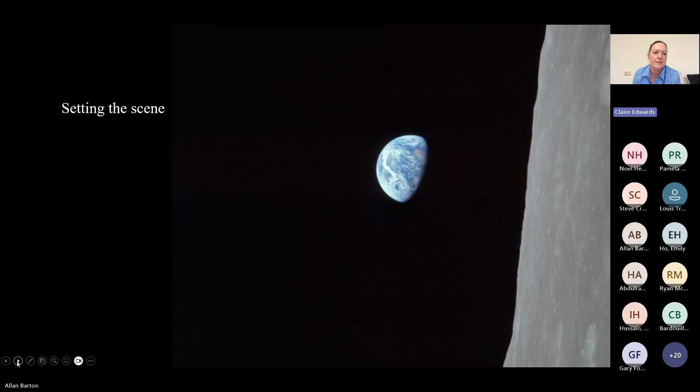So here we are for our talk today. Now, I think, Alan, it's really important to ground us in this topic of the circular economy as we start, so could you please set the scene? Okay, well I'll set the scene and explain why we need a circular economy. But first I'm going to talk about how we got to today. There were three major events that occurred between those dates.

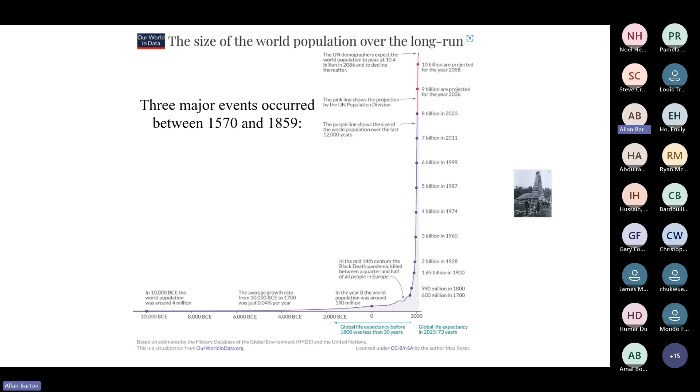We discovered affordable sources of energy, we had an industrial revolution, and our population started to increase significantly. In fact, it went off like a rocket, as has our ingenuity, our GDP, our ability to produce power, and our use of the planet's resources.

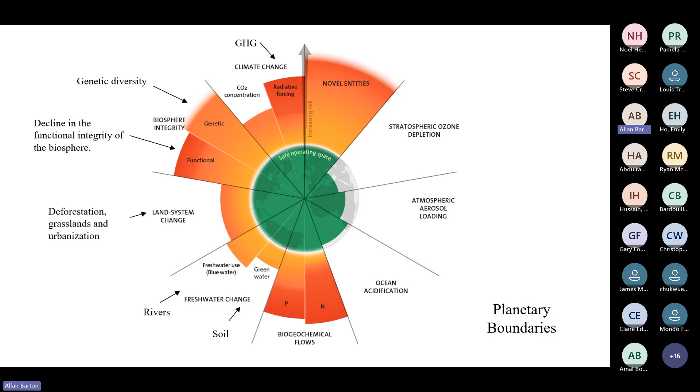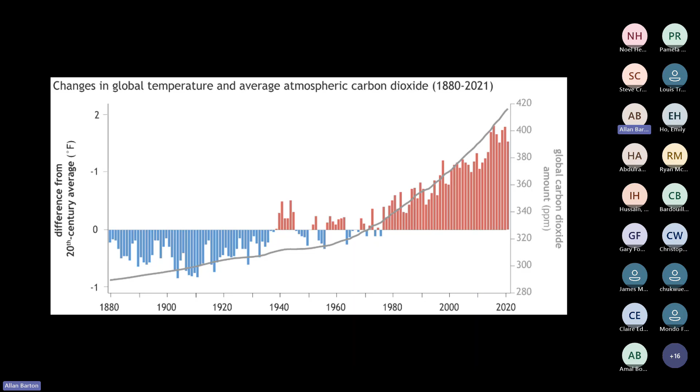And more importantly, our use of green water - green water is the water that grows our crops. We use far too much fertilizer, and we've produced an enormous amount of toxic materials. Our carbon dioxide in the atmosphere has increased, and that's caused our temperature to rise. And now roughly 50% of our planet is there to feed us.

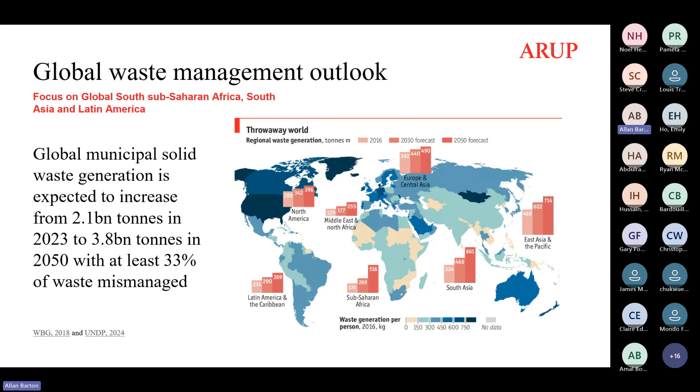In the past 6 years, we've used over 500 billion tonnes of materials, nearly as much as the entirety of the 20th century. And in 2023, we produced 2.1 billion tonnes of municipal waste.

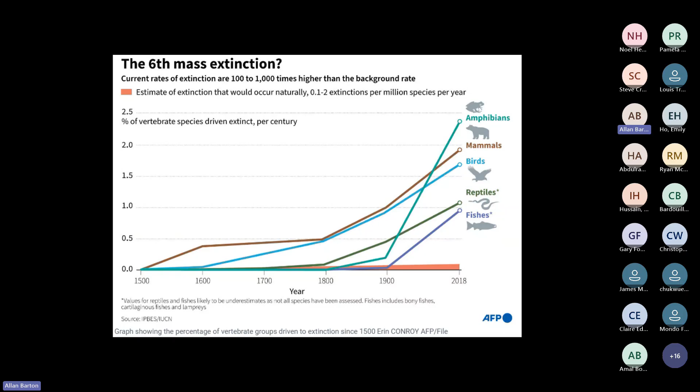There is a view we are at the start of the 6th mass extinction event on this planet, caused by us. Most of the time, we've lived in a linear world where we take materials, make them into something, and then simply dispose of them.

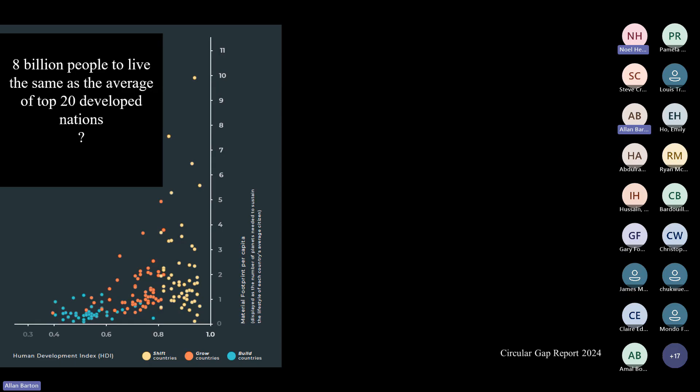My question is, for 8 billion people to live the same as the average of the top 20 developed nations, how many planets do we need? Well, the answer is 3.6. Guess what? We've only got one.

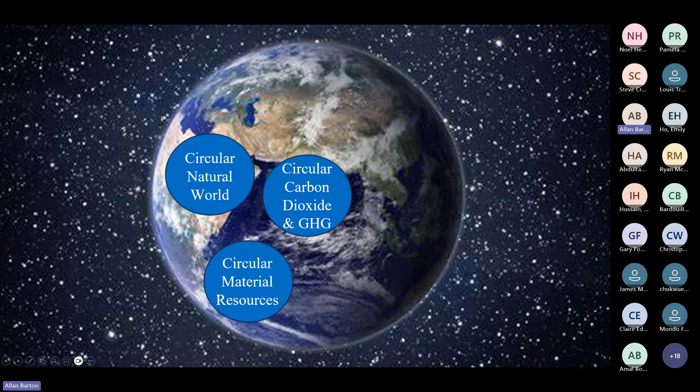So what must we do? Well, we must deliver on the UN sustainability goals, and we must start treasuring our planet and have circular ecologies and a way of managing our home in a circular way, a circular economy, particularly with regard to greenhouse gases, the natural world, material resources, water, atmosphere, and population growth.

On greenhouse gases, we must get our carbon back in balance again and deliver on our COP promises, focusing on all greenhouse gases and all sectors that produce them. We really need to develop a joined-up plan to get us to the point we wish to be. And if we can get back to pre-industrial levels, that would be great.

The natural world, well, we've got to stop reducing it and re-establish the natural world, delivering on our COP promises. Material resources, we must treasure them. We've got to realise that the planet's inorganic resources are finite and never disperse them beyond the reach of future generations. We've got to reduce consumption, consider whole system thinking when we design things, and produce no waste.

As far as water goes, we must treasure and manage our water, and we can use nature to help solve some of our problems. But we've got to stop polluting our rivers and oceans, and if we can get the global ocean temperature to decrease, that would be brilliant.

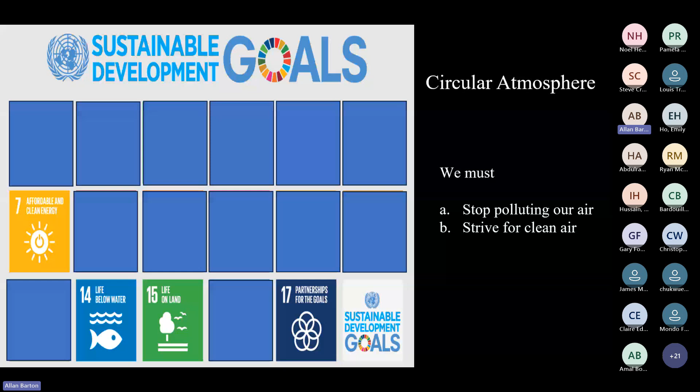Atmosphere, we've got to stop polluting our air and strive for clean air, including clean technologies for transport. Population, well, hopefully if we provide a reasonable lifestyle for all and better education globally, our birth rate will equal approximately our death rate.

So we need circular ecologies and a circular economy.

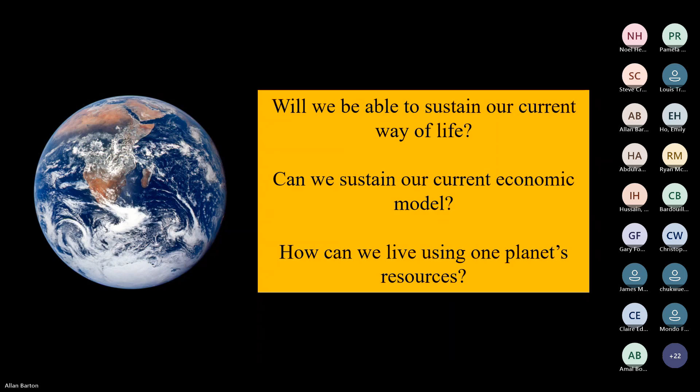Now I've got some difficult questions for you. Will we be able to sustain our current way of life? Can we sustain our current economic model? How can we live using one planet's resources? Is humankind doomed? Yes, things aren't too bad, but they're getting worse, and we potentially have some tidal waves coming at us. So we need to start acting seriously now.

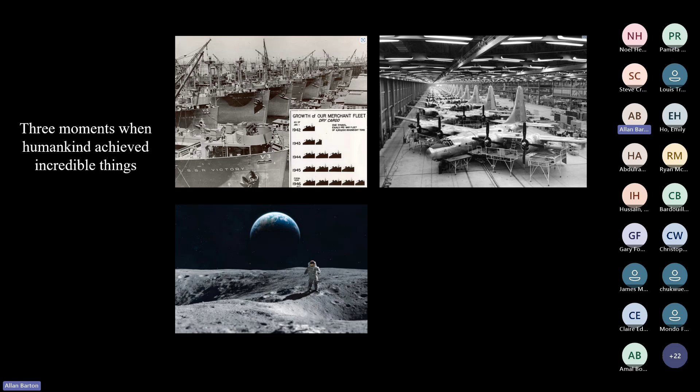Is it inevitable? Is there hope? There were 3 moments when humankind achieved incredible things. In the Second World War, the United States significantly increased its production of ships and planes, and we won a war. We put a man on the moon, and we produced a vaccine very quickly. We need that mindset applied to living in harmony with our planet, because provided we do, and get on with it now, I think there is hope.

And then if we all play our part, hopefully we can make our planet smile. Thank you.

Thank you, Allan. You've really done a great job there of positioning our circular economy, definitely treasuring our material resources, stopping polluting our water and our air, and making sure we have that joined up plan. So maybe moving now on to Steve, because based on some of the things Allan was presenting as ideas, what would you like to share with us about upstream oil and gas?

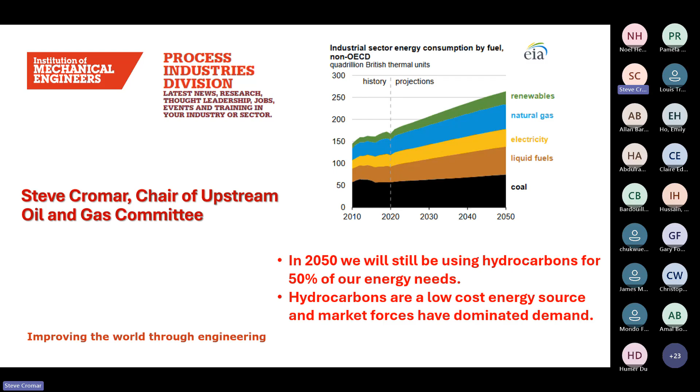So I thought I'd start with something non-controversial: drill, baby, drill, the oil industry.

Since Mr. Trump told us we should drill, baby, drill, we looked at that. If the oil industry starts producing more oil, it's a global market, so the price drops. If the price drops, drilling slows down, people are laid off, and the oil price drops again. So we end up with an oil price set globally, not just by one politician. And it's interesting that since making the statement, the oil price and drilling have barely changed.

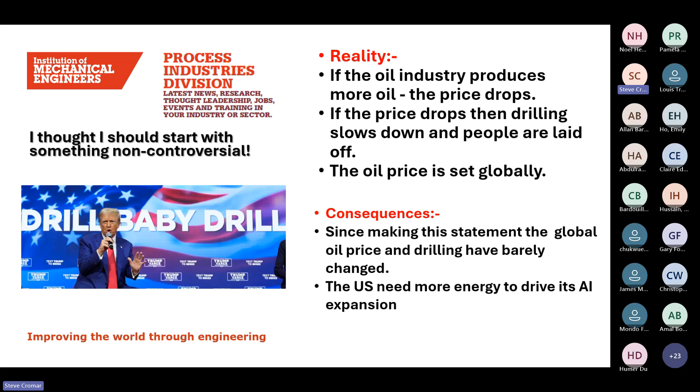But the US needs more energy, and it's mostly for AI expansion. AI and Bitcoin are using more and more energy. People can ask, is that helping the planet a lot, or is it just helping some rich people? The amount of energy used in Bitcoin and AI is unbelievable.

But one of the other things that was hidden was that in addition to drill, baby, drill, Doug Burgum also said mine, baby, mine. The US administration have put an enormous amount of taxpayers' money into the coal industry, opening federal lands, slashing royalties, and extracting more coal. The reason is that the US has large coal resources.

But it's impossible for coal to do that because it's not a reliable power grid. The peak demand required is absolutely enormous, and coal's simply not going to do it.

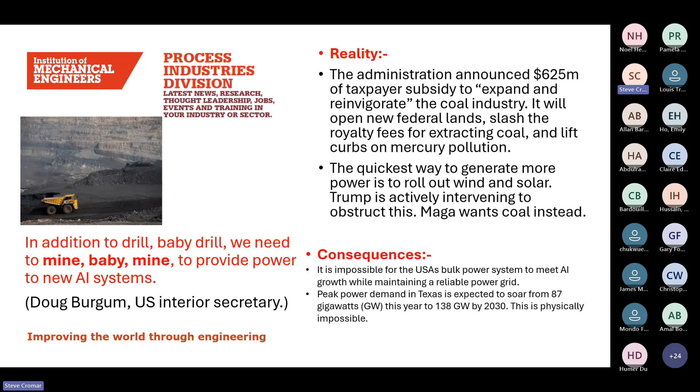Now, this is one of the main reasons: if you look at oil and gas, large construction projects, whether you drill, baby, drill, it's going to take 5 to 7 years to get that major construction project out there. On the other hand, look at offshore wind, onshore wind and solar, 1 to 2 years - a much faster turnaround time to get your energy onto your system.

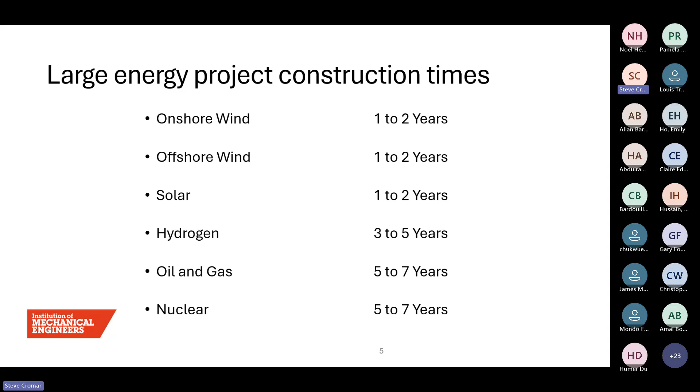China wants to expand its AI production, that's why. They also want to get away from high-cost hydrocarbon imports, and they're allowing market forces to determine electricity generation sources.

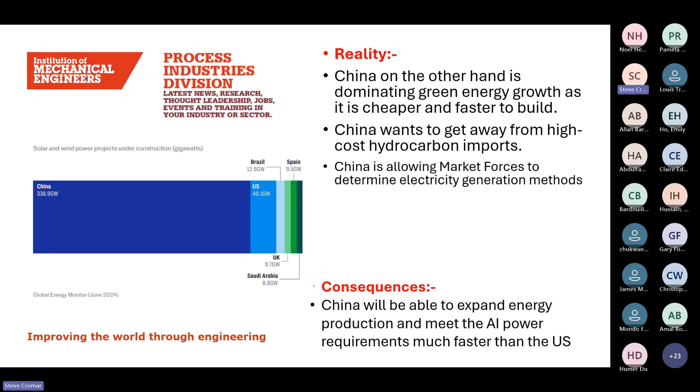So what have we learned? Expansion of the future market is dominated by AI power requirements and air conditioning, keeping those units cool. Renewables are a much faster way to increase energy production, and that's a much better way for the planet as well. Electricity from oil, gas, coal and nuclear are high cost to build and always deliver late and leave legacy issues.

So the message here is that political interference is a major blocker to energy efficiency. I'm talking about energy efficiency - I'll be using those two words all the way through here.

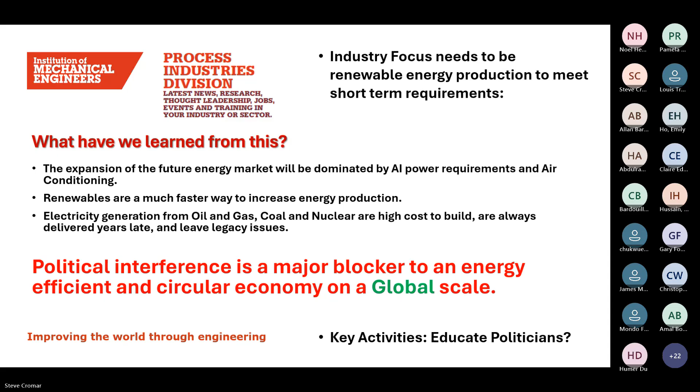So let's look at it in the UK market. The price of electricity in the UK is set every half hour by the marginal cost of the last generating unit to be turned off to meet demand. You need to try to understand this.

The government had considered a zonal pricing system - basically you'd have lots of electricity in one particular area, so the price would go down using market forces, energy efficiency. Under the scheme, power costs would match local supply and demand. It would lead to lower energy costs, and areas with abundant supply could possibly get AI farms to go up there and build where electricity is cheap. That's used in Australia, Italy, Sweden, and many other countries.

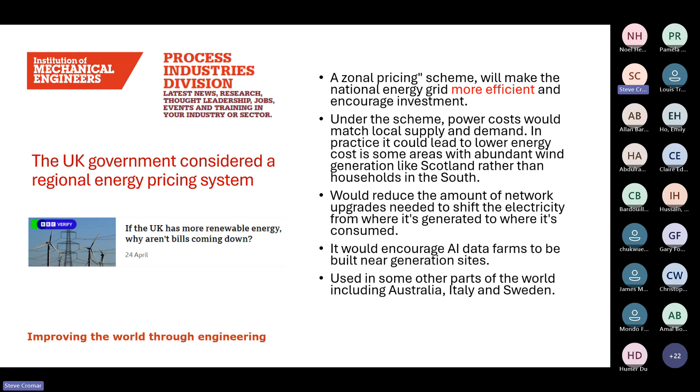You can see at the moment the map shows the location of UK data centres, and they're all located down towards the south. But all the cheap electricity is being produced up in the north, and we're having to build massive pylons - highly inefficient, energy inefficiency - to pump it down south. But the Labour government decided not to produce that because the cost of electricity would have increased in the Labour voting areas in the south.

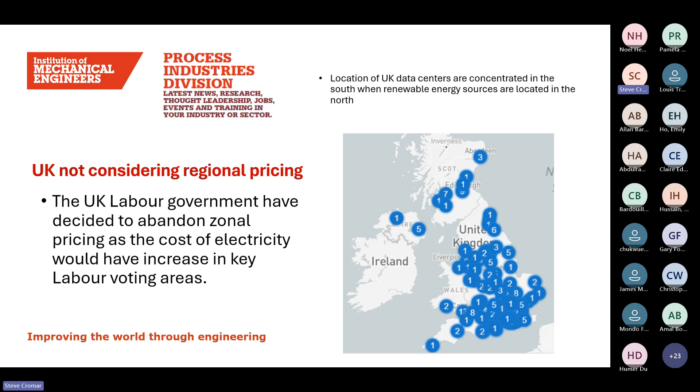So what have we learned from that? Renewables are a faster way to increase energy production. The UK power grid is a blocker on the UK. We get 60% losses in some cases from producing energy in the north and taking it to the south. We've got to build it, there's a lot of public opposition, and we're not getting an efficient circular economy. So political interference again can be a major blocker.

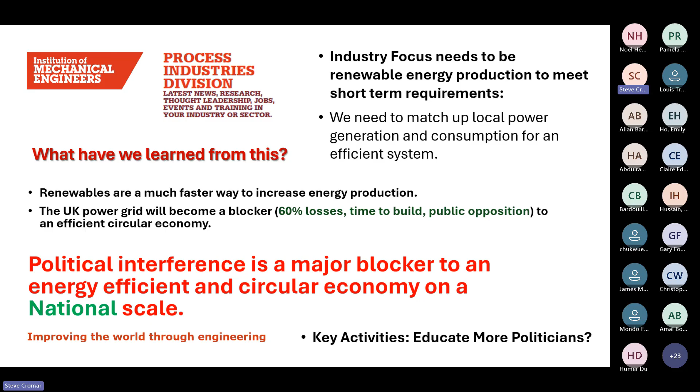Now these were blockers for getting to the circular economy. So politics is a bit of an issue. But there is another way, an opportunity. If we create a micro-circular economy for yourself, don't involve politicians.

In other words, this is the idea of putting solar panels on your own roof. Don't connect up to the national grid. Don't use energy sources where the price is set globally. Believe market forces that renewables are faster to install.

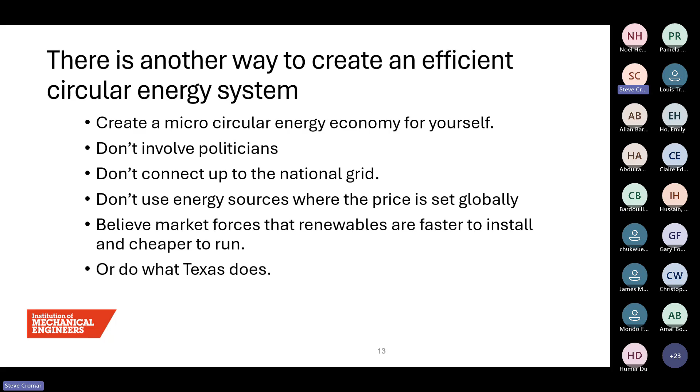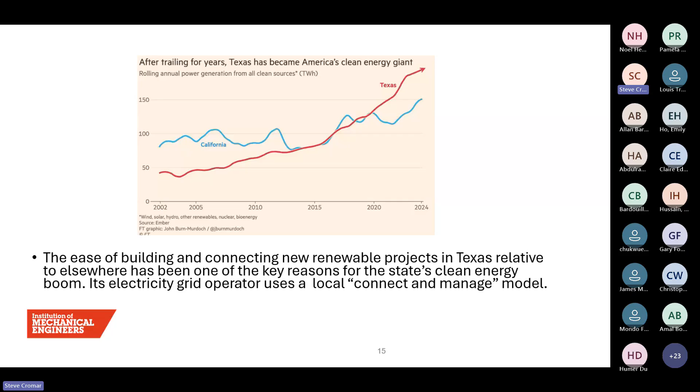They have a system where one guy can produce electricity and sell it to another guy locally, called a connect and manage system. So the two systems are tied together, you're not pumping electricity all the way across the country and losing half of it in the process. You're producing it locally and connecting it locally, and it's a much more efficient system.

And I can't stop without saying geothermal. Geothermal is the great untapped, unrecognized energy source that could be the source. The potential is absolutely astronomical. People need to consider that. And that is my last slide.

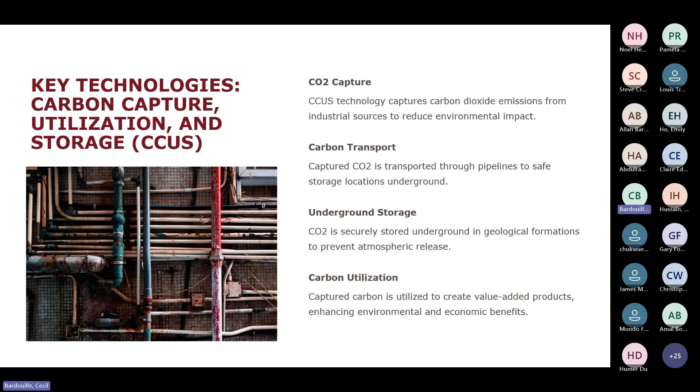And then carbon utilization, looking at ways that we can use carbon back in industry and in society too, and the economic benefits that can come from that.

So we are working in partnership with other companies, working in partnership with industry and research organisations, and also working in partnership with the government who helps to fund these projects.

This leads us to emissions reduction so that we don't generate as much carbon, we don't put that into the environment, and we reach our environmental sustainability goals. But we also have a positive economic and industrial impact, that we're able to create sustainable industries that will be able to continue for many, many decades, creating jobs for many generations to come.

So a wonderful thing to be part of, and it's great to see that the UK is progressing that. You know, we have actually broken ground here. We are building these plants now as we speak, and working with other companies to see if we can help to decarbonise them too in the UK.

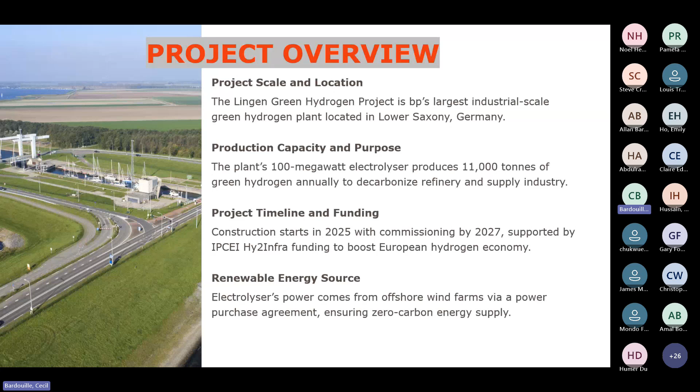Why is this important? Well, it is strategically important for Europe and for the local and the major economies. We'll be able to produce green hydrogen, so hydrogen that's generated from renewable energy sources, as described before, as opposed to just stripping the hydrogen atoms out of the hydrocarbons, like we've been able to do in the past from methane.

We can also expand, so it's got scalability. We'll be able to tap into the wider German hydrogen pipeline or network that they're looking to build at the moment, so that we can continue to expand that around Germany, and similar projects are being considered in the UK too, and other areas in the world. Australia's looking at it quite seriously as well.

So we'll have a renewable energy integration program, where we are linking wind energy to power purchase agreements. We're generating green hydrogen, and we're using that hydrogen instead of burning fossil fuels, and we're not generating CO2 discharge, so we don't even have to capture CO2 if we are burning hydrogen.

So quickly for the challenges, I think I'm at the limit of my time. Infrastructure readiness - these commercial agreements and pipelines are not fully in place yet, so we are still looking to build the customer base of who we can sell the hydrogen to, so that we do have reliable distribution.

Economic viability - the profit margins are smaller than oil and gas companies are typically used to, so that poses challenges. Hydrogen pricing, we're not sure how that's going to go in the long term. That too generates challenges and financial risk. Hence, having the backing of government, things like that are so essential.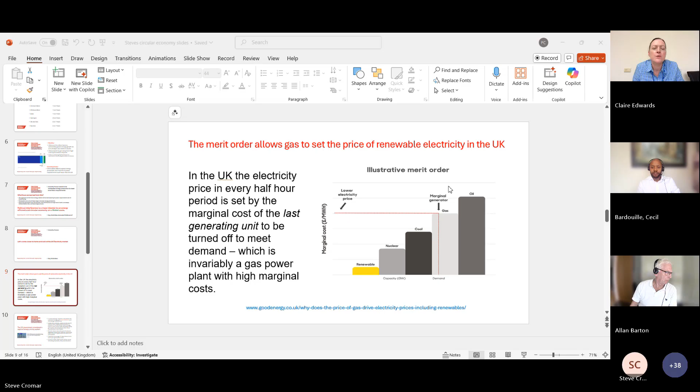So, Steve, you broke up a bit there, but I think you're advocating that our energy solutions or the choices we make are not one single thing, but a bit of a balance, and also being sensible. And I think it comes back to where Allan was talking about at the start about treasuring our material resources. I think you're advocating the same point around use what you've got as wisely as possible, based on hydrocarbons being high energy density. So thank you for that one.

Maybe there's a thought here, Cecil, on that comment. Do you think oil and gas has a place in a future circular economy? Clearly some of the projects so far are looking at switching perhaps more to hydrogen, was the example from Germany, yes? Yeah, that's right. So that is about switching and generating energy through green, sustainable methods.

I think another thing we didn't have time to mention, but we've explored and progressed a number of sustainable aviation fuel projects. These are often closely linked with government legislation. So if we can generate aviation fuel from sources, anything from waste oil, chip fat, industrial oil, these types of waste again become a type of hydrocarbon that can be processed and used. And it is a transition. It may be 5-10% in the years to come of the aviation fuel that's sustainable, but we could continue that trajectory till eventually we are maybe 100% potentially.